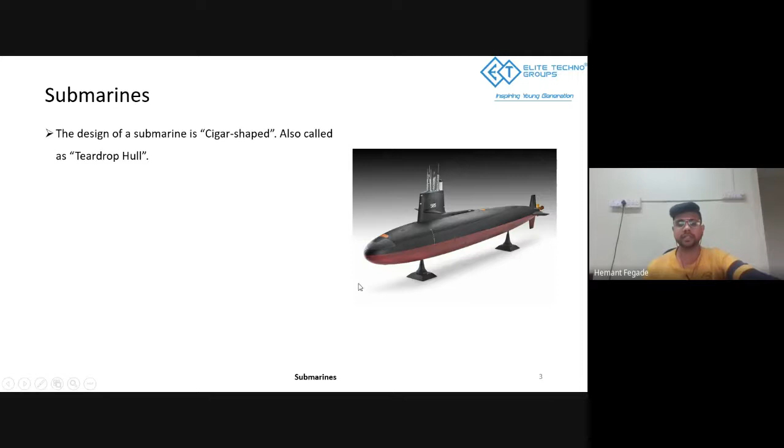With our topic starting off, here is a basic model of a submarine. This is how a modern submarine looks like. It's designed as cigar shaped, also called a teardrop hull. It is designed in this peculiar way in order to withstand the incredible amount of pressure when it does a deep dive. This is the most optimum shape to withstand the huge amount of hydraulic pressure it is under.

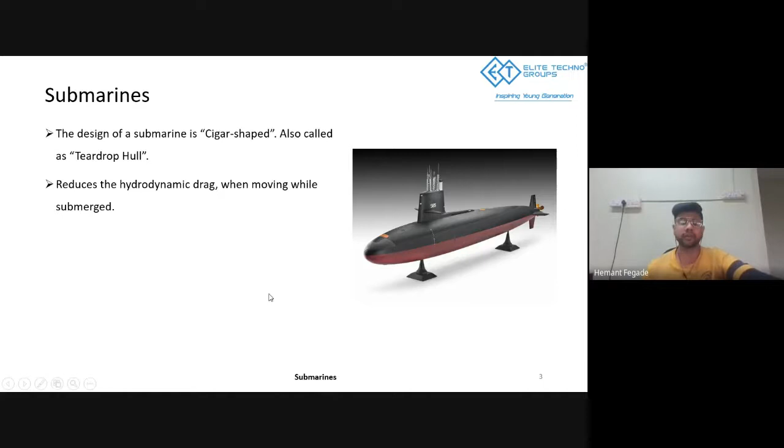While moving under that level of pressure, it generates a big level of hydrodynamic drag, which creates restrictions to the motion, and that's why we need more power for it. So in order to make it more hydrodynamic, we use this teardrop hull as a shape. Also, it has a raised tower, as you can see over here.

Basically, just a minute.

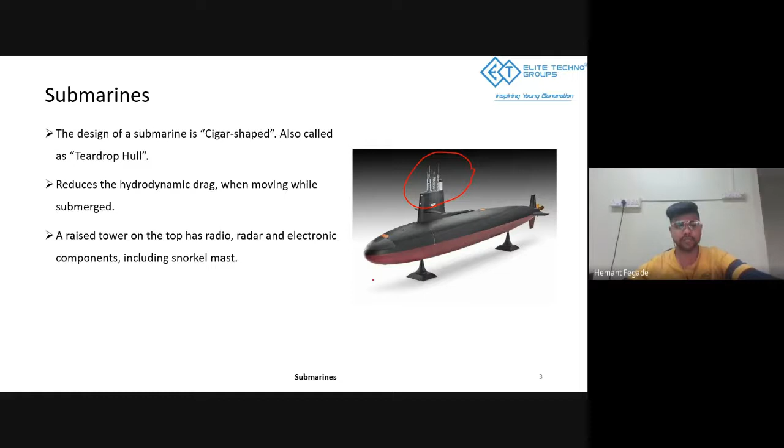This part will be all the electronic components: communications, radar, periscope, also the advanced mast system, which is used to navigate, or all the navigation systems and radio electronics will be mounted over here for better communication and better range. So that's the general idea about it.

Now, can anybody tell me this concept of buoyancy, what it stands for? You guys can unmute yourself or even drop something in chat. What do you guys mean by buoyancy force or buoyancy?

Anything immersed in a fluid, the upward force exerted by the fluid is due to the weight displaced by that object. That's exactly correct, Abdullah.

Now I want to understand from your point of view, how is buoyant force relevant in this context? In the context of submarines, how is buoyant force relevant? Can you guys tell me?

I'll give you a little hint. It has something to do with diving.

So, as somebody was saying, exactly the same thing - what we do is we first fill the whole tank with water in order to deep dive. Then, if you want to resurface it, we basically empty the tank out.

Now let's understand this concept in a much better way. So here, this is the cross section of the submarine. And here, as you can see, these are basically the valves through which you can empty out the air, fill in the water, and then balance it out the same way.

So these are the four valves that are being basically used, and over the span of the submarine they are installed in such a way. So if you take this as a submarine, you will have your rear ballast tank and your front ballast tank. This is the cross section that you are seeing over here.

If you look from this side, you will see this is the section we are looking at this stage. So there is one more idea behind this submerging-resurfacing concept. Basically, if you regulate the quantity of water and air in a better proportion, your submarine will be stable at a particular stage.

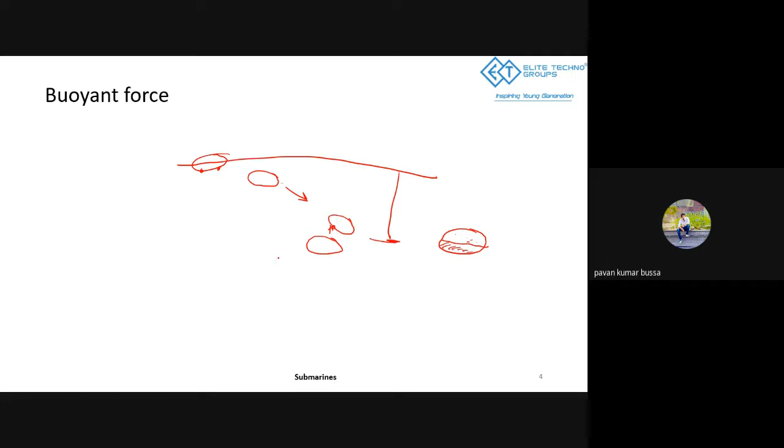First of all, I want to ask, is this concept clear to you? Sir, yeah. So this concept is clear to you, right? Yes sir, yeah, good.

So now let me redraw it. At this stage, let's just start at the bottom. Now my submarine is at this level. Now I want to resurface it from this particular point. Let's suppose this is my rear ballast tank, this is my front ballast tank. This is rear, this is front.

So first off, my first question is, at this stage, what is the status of this ballast tank? Can you guys tell me? Both are filled with water. So are they completely filled with water? Not completely, but half, as the submarine is not in deep water, it's in between.

Okay, correct. Now if I want to resurface this submarine and bring it over here, what is the process that I need to follow? First, we need to empty the rear tank to reach the surface quickly.

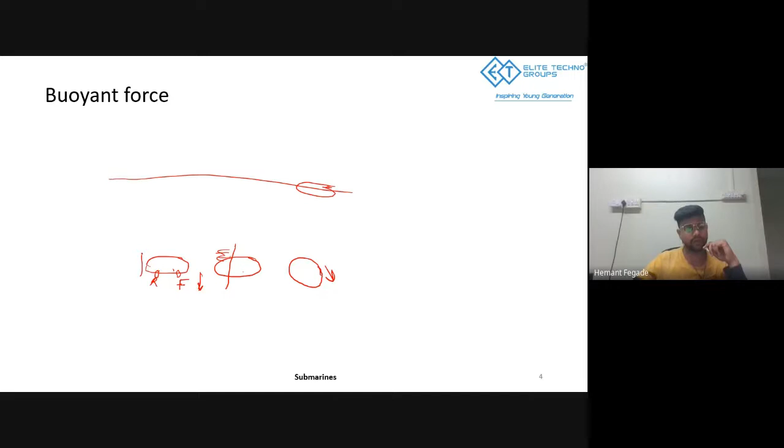Okay, so I'll tell you what happens at this stage if you empty out your rear tank. Basically, you're releasing weight from this side of the submarine, so again you will have this angle. Your front tank will go downside, your rear tank will go upside. In that case, the front end of the submarine will point towards the bottom side and the rear end will point towards the upside. So in this situation, is this correct first of all?

No sir, it's necessary to reverse the process. Yes, we need to first clear the front tank to get the angle, and then slowly empty the rear tank after getting the first.

Correct. So basically this is what these guys are talking about. First we'll empty out this one, then we will have this angle. Then slowly we will empty out the rear one, then slowly go upstairs, and here we will have a submarine.

So this is the basic mechanism of diving and resurfacing and how this dynamic works. Now another question arises: what about the air? How are we maintaining the air? How are we refilling and emptying it out? Can anybody tell me?

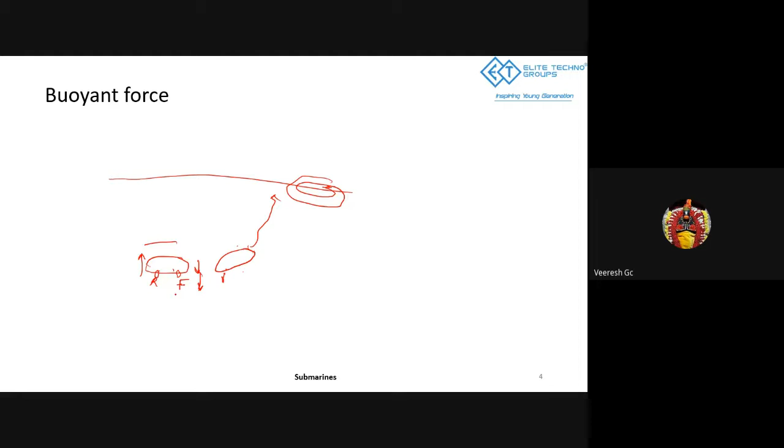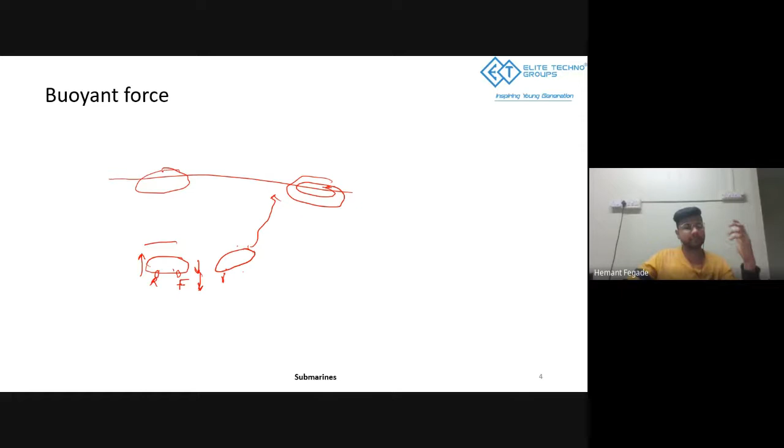Okay, that's interesting, but focus on the question. What my question is: I have this stage. Basically, if I'm filling my ballast tanks with air, it is understandable because I'm floating, there is air available which I can access and fill it up. At this stage, if I release the water, I need something to push that water out. So think on it a bit and tell me what could be the thing I'm using to push the water back, because at this stage we will have immense hydrostatic pressure, and this tank, if you want to empty it out, we need to balance the pressure. So how are we going to do that? Does anybody have any ideas?

We can do it by increasing the pressure inside the tank using some pump or equipment like that. A compressor.

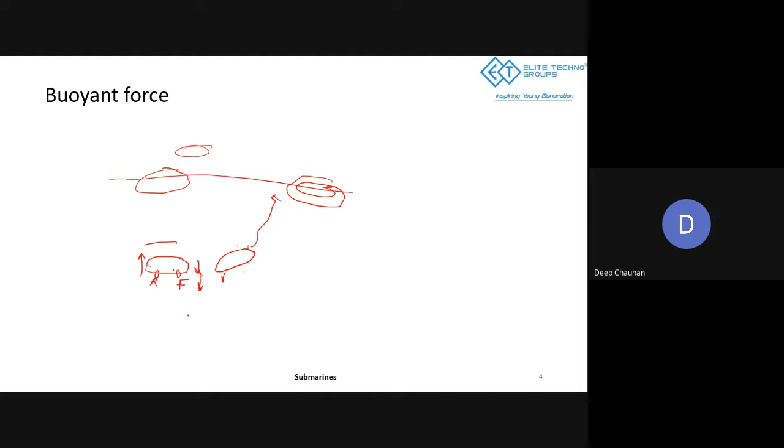Correct. So what happens is, basically, you see this big chunk, what you can call the tower at the top. Here there are two separate air tanks. Now these air tanks are very highly pressurized, and using these pressurized tanks, they are basically forcing the water out, again retracting the air, creating a vacuum inside, and we're basically coming on board. So that way we are maintaining the integrity of the ship. We are also maintaining the diving and resurfacing phenomena, and that way we are trying to accomplish this particular dynamic.

Okay, so this is about the basics of how we are submerged underwater and how we are resurfacing. What about the next question?

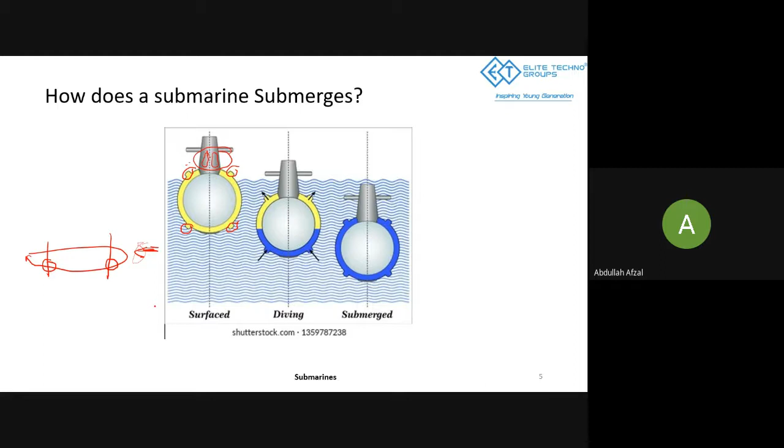Excuse me, which fluid is used in those tanks present in the tower? It's air only, it's normal air. Those small tanks are specifically designed in order to insert air into this.

So basically, you see these walls? These walls are incorporating air from external means. But if you are inside, completely submerged, completely filled with water, you need to push this water out. So here there are tanks installed, through which all these four walls are opened up, and from all these four walls the water gets pushed back. Then there is a mechanism for it, like seals and everything. So once the water is pushed back, you will seal it up, and accordingly you will be able to float in and resurface. So that's the dynamic here.

I hope that answers your question. Thank you, yeah.

So as I said, before I move on to the next thing, if anybody has any doubt with this particular concept, they can talk to me, they can tell me. So actually, you're asking about the air, how we'll get the air inside when it has been submerged. So I did not get completely the answer you said for that.

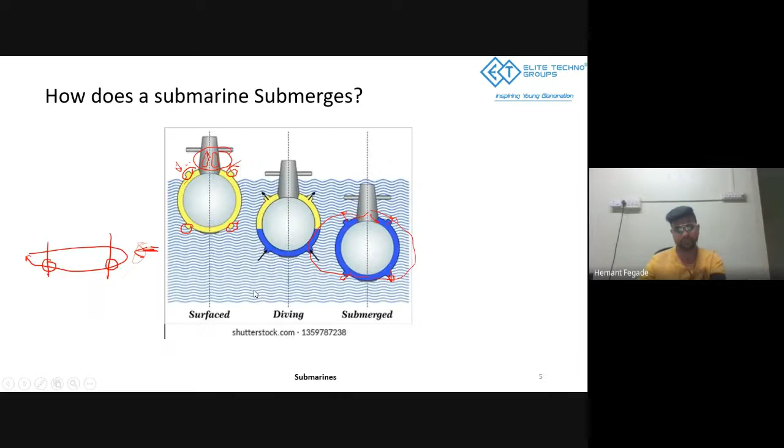Now let's see. Yes Viresh, go ahead. Sir, these ballast tanks will be present externally or internally fitted, sir? It will be internal, all internal. Okay thanks sir.

So now another question is, how does it see underwater? Because you are at a depth where light cannot pass through due to the water, how are you going to navigate through the waters, how are you not going to hit a boulder or something while underwater? So there is the sonar concept, sonar technology.

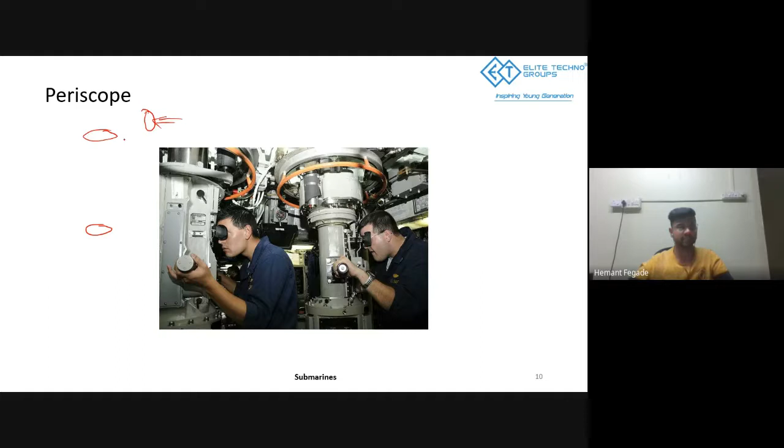You will have an equipment called periscope. In this periscope, there are a bunch of mirrors installed at a 45 degree angle. Let's suppose this is your pipe, and your light rays are coming from this direction. Let me just complete the drawing. You're here, you're seeing from here.

So there are mirrors installed at 45 degrees angle, which basically translate the light from this point to this point. It will capture whatever this lens sees in terms of light fragments, and that is transmitted to this stage. That's how you can see above water what is happening above water.

But in order to see this, there is a limitation. If you are deep under the water, in that case, you will have a limitation of extending this periscope rod. You can extend this periscope rod only to a certain extent. It's not always that you will be able to extend it to the top, no matter what depth you are at. So there is one limitation for this.

That is, you have to come up to a certain height in order to actually access this periscope. This is another way that has been used for hundreds of years for detecting if there are any submarines in the waters, or enemy ships or anything like that. Because as our submarine has this particular limitation, the enemy submarine would also have this same or similar kind of limitation at that era, like around 50 years back, even 20 or 30 years back.

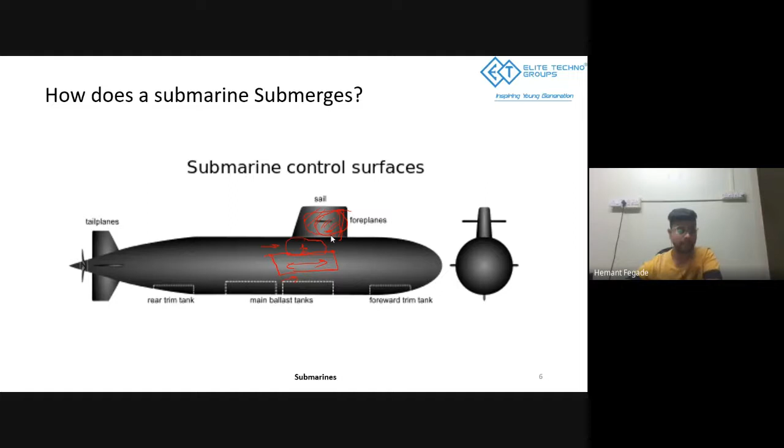Just bear with me. The basic concept with this periscope is we want to see what is going on above waters, and in order to predict and understand the outside dynamics, we use this, because underwater you might not even understand that there is a storm going above the seawater level. Even in that case you need a kind of monitoring system, a feedback system, to tell you what is going on outside and what sort of things we should do.

Here you will be able to understand the significance of it. What I was talking about the control compartment, I'll again talk about the propulsion system and all these things, but let me just cover this particular part.

Now, with the case of periscope, we had to install it near this part. Basically, this is your upper deck, this is your middle deck, and this is your bottom deck. So due to this limitation, the size of the control room became very cramped and uncomfortable for the crewmates, because at times crewmates stay underwater around 70, 80, even 90 days.

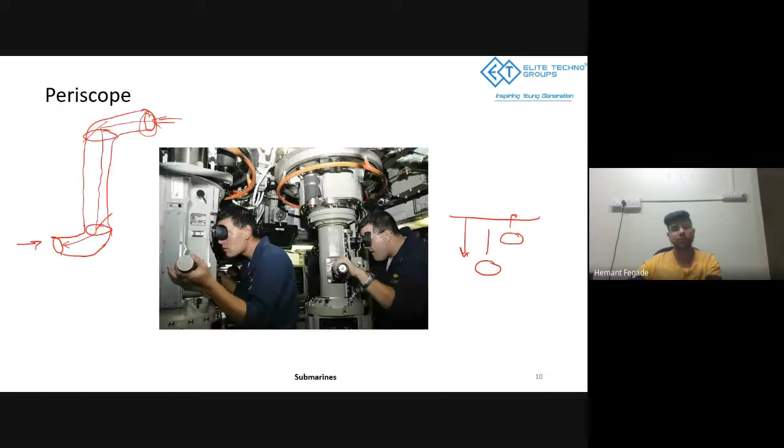There is again a condensation system which condenses the water and resupplies it into this box. So that way, using the nuclear reactor system, you will be able to power the whole submarine. Here, what happens is we are generating electricity even while underwater, without needing to pump air externally.

Still, you will need oxygen to survive underwater. So basically we have oxygen generators. What happens in these oxygen generators is, let's consider this a box, and here you will have electrodes installed, and there will be potassium hydroxide, I think, which is used as a supplementary solvent or medium.

This is filled with water, seawater basically, which is desalinated. All the minerals are removed, so salty water is turned into normal water, and you oxidize that water, creating an electrolysis process to release hydrogen and oxygen separately.

I think I've drawn it wrong here. This is a connection between these two tanks. The separation is basically your negatively charged and positively charged electrodes. The negatively charged electrode releases hydrogen, the positively charged electrode releases oxygen. That's how you generate oxygen.

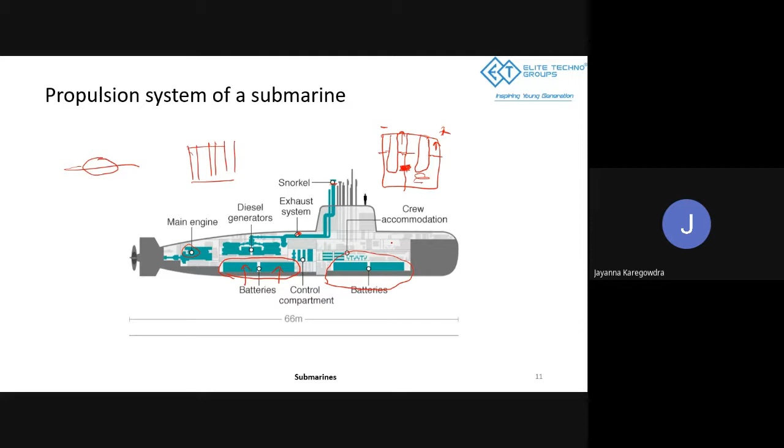Now in India, how many have they produced till now in Visakhapatnam? Not sure about that actually, how many we have produced yet, but we do have some, I think, borrowed from Russia itself - one of the early versions of Typhoon we have, I think. I read somewhere that India first launched the submarine from Visakhapatnam port in Andhra Pradesh.

Okay, please continue. Yeah. So all in all,

This is how submarine propulsion works. Simply, you will have either a diesel-electric mixed kind of propulsion system, which uses a generator to power up the batteries, and those storage batteries power up the main engine and the rest of the submarine. Or you will have a nuclear reactor based submarine, which uses nuclear fission to generate heat. That heat is transferred through water to generate steam, and the steam is used for generating electricity using a turbine.

So that's the general idea. Now, in conclusion, we have seen what a submarine is, how it submerges, how it resurfaces, how it sees underwater and over water, and what its propulsion system is and how it works. So,

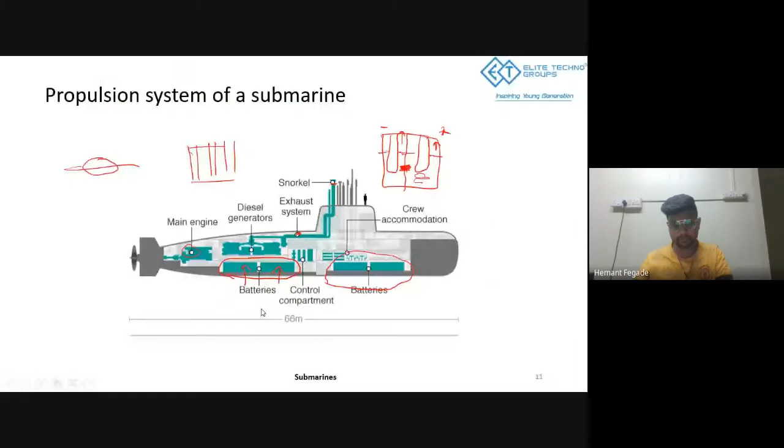Okay, let's have an example of a little experiment. Now consider this is an empty bottle, and this is a glass, not a flask. This is an empty bottle with only air inside. Now if I place it over water, what will happen? Can you tell me?

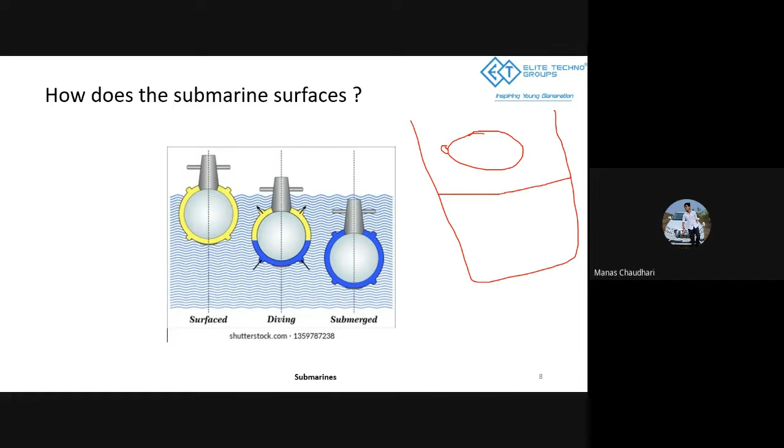It will float, right? So in the case of submarines, if you want to float, this concept is your ballast tank, this region, the outer, what you can call it, the gap between the outer shell and the inner shell.

Okay, now consider this is empty. So once it's empty, even though with the weight of the submarine, this is very much calibrated—the size of the ballast tanks, the weight of the submarine, how much weight it will have in order to float over the sea. So this is all very calibrated, and accordingly, you will be able to float over water.

Now, once you push down, once you fill this up with, let's suppose, half the water, it will sink down in equal proportions to the weight amount of water that you have added. Basically, the amount of water you've added adds to the weight of this bottle, so it will sink up to a certain extent. Let's suppose it comes down here with this.

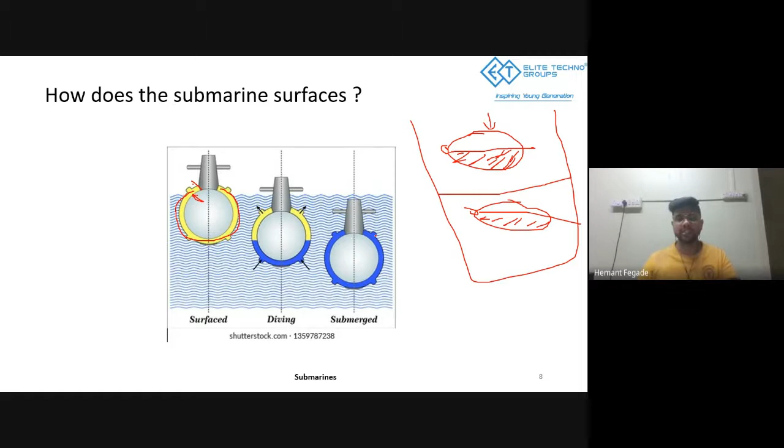So this is the idea. Basically, it doesn't matter if your submarine is wet or dry. It will add a few pounds, maybe a small amount of weight, but it is still within their calculations. So basically, to answer your question, it doesn't affect it. It's just a submerging and resurfacing phenomena.